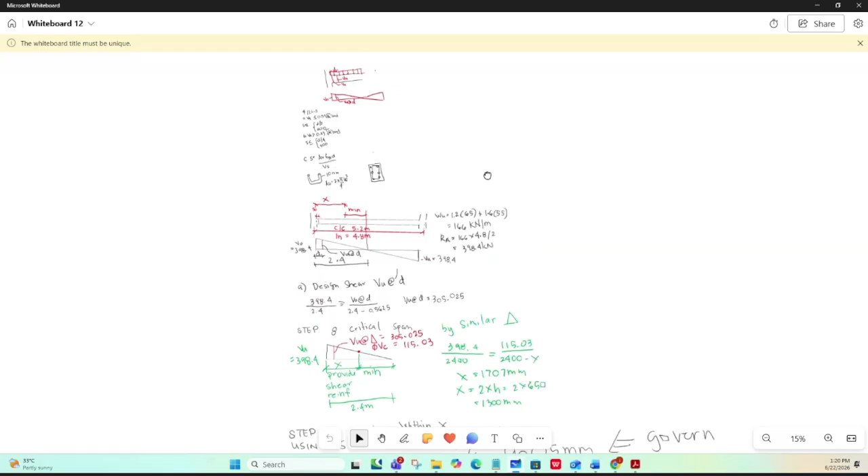Okay, so this is the face of the support. This drawing, this illustration, this sketch is showing the beam and the column, on this side. This is the column and half of the beam. So this provision, 409.4.3.1, allows the VU to be at the face of the support.

So we can use the shear force at the face of the support to design the reinforcement. Or the code also provides a provision that we can calculate the VU at a distance D.

This is for 409.4.3.2, the section between the face of the support and the critical section located at D from the face of the support for non-prestressed beams. For prestressed beams, it's H/2 from the face of the support, and shall be permitted to be designed for VU at the critical section. So the critical section will be at the distance D.

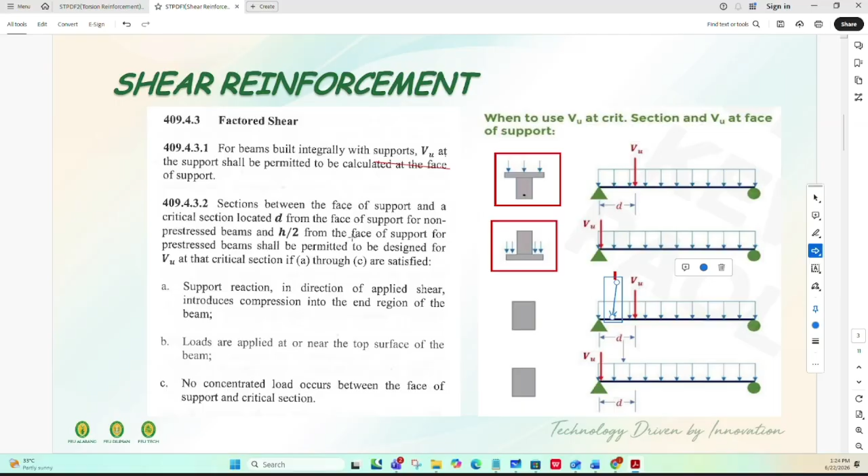So if there is a point load here, meaning either you have a transfer column or a secondary beam connected to this beam, you will not be able to use this provision, point 2. Then you go back to point 1, which is the maximum shear force at the face of the support. That is what this NSCP provision means. And then, for the shear reinforcement critical section, that's done.

So for shear reinforcement design, concrete has a shear capacity - concrete contributes to shear capacity, and concrete itself has significant shear resistance. For non-prestressed members, the concrete shear capacity is calculated using this simplified formula.

This is the shear capacity of the concrete, which is 0.17 lambda square root of FC prime, bW, d. Lambda is for normal weight concrete, equal to 1.0. If it's lightweight concrete, you need to calculate it.

Let me check the provision - there's a provision in the NSCP where you can calculate the lambda for lightweight concrete. I don't think I wrote it here.

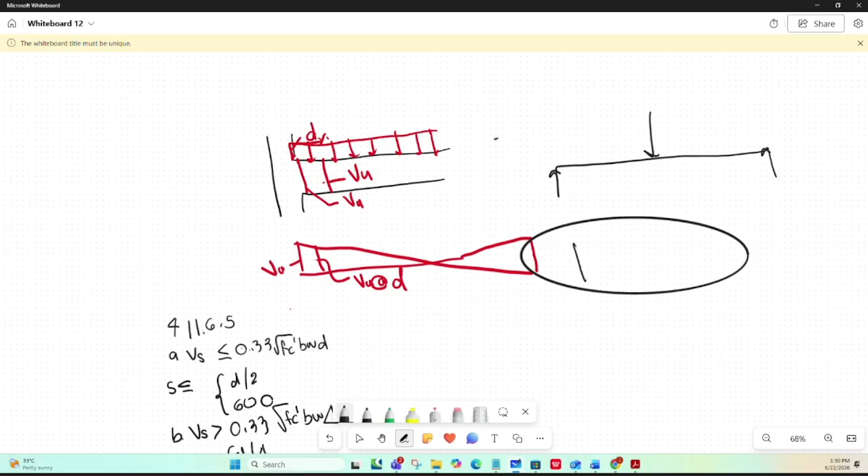So if you have a uniformly distributed or simply supported beam with a point load at the midspan, it will not go to zero. So the shear diagram will be like this, it's like a curve. This is the shear diagram.

So this means it is not zero at midspan, but we need to check. And then definitely if you have a point load, the shear force at that location where your point load is will be higher because you have a concentrated load.

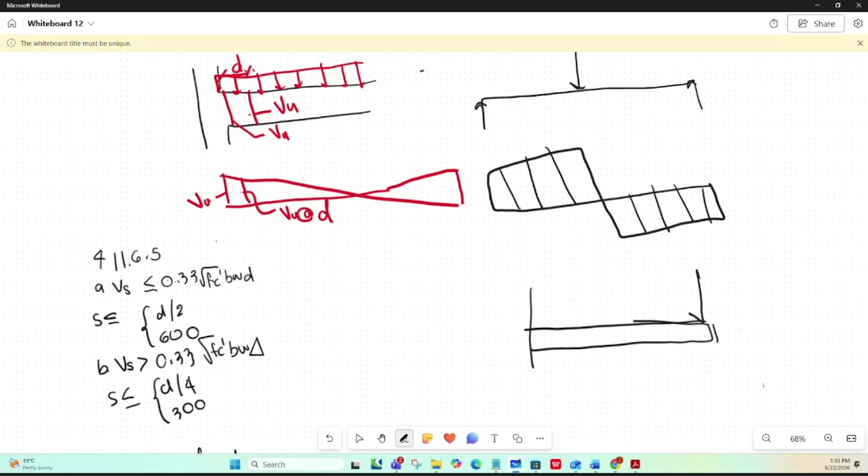And then for a cantilever beam with a point load, there's no zero shear, so it goes straight up. This is cantilever, the support is here only.

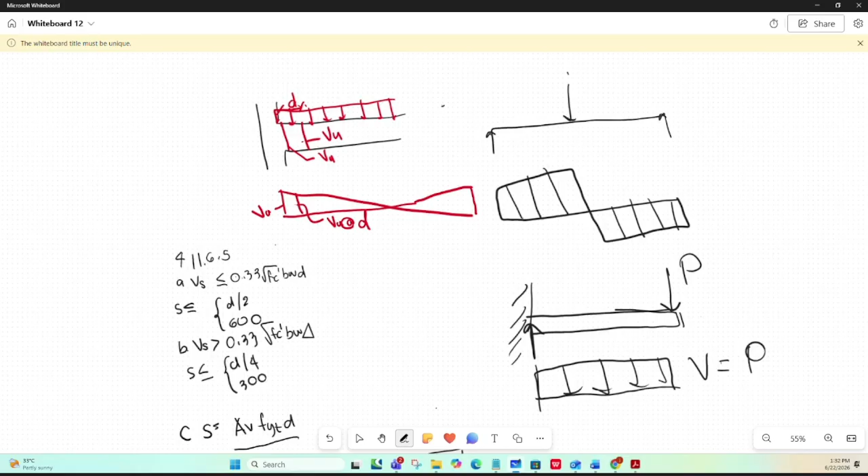What else do we need? Okay, so that's it for the analysis.

So for the strength reduction factor in reinforced concrete design, we do not use theoretical capacities directly. Instead, we apply the strength reduction factor represented by the symbol phi. For shear and torsion, phi is equal to 0.75, meaning only a portion of the calculated shear capacity is considered reliable for design purposes.

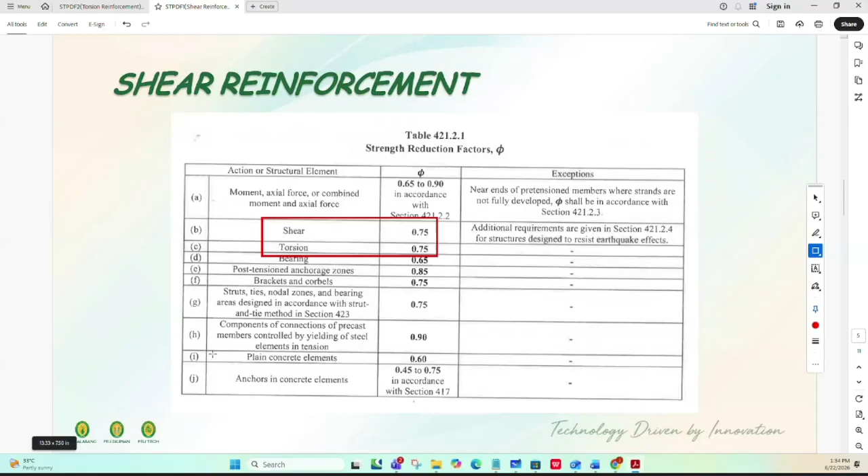Then, maximum shear strength. The code provides a limit for the shear strength Vs. It shall not be taken greater than 0.66 times square root of FC prime, BW, d.

So what does this mean? Can we simply add more stirrups whenever shear demand increases? That means if the shear capacity demand requires more than this value, we cannot just add shear reinforcement. The code limits the maximum contribution of shear reinforcement according to this value, 0.66 square root of FC prime BW d.

This provision recognizes that concrete can eventually crush before the stirrups reach their full capacity. In other words, this is a practical limit to the amount of shear that a beam can safely resist. So if the required shear strength exceeds the code limit, the engineer should consider either increasing the beam depth, concrete strength, or beam width, since the formula is directly proportional to the Vs capacity. Increasing any of these three will increase the Vs.

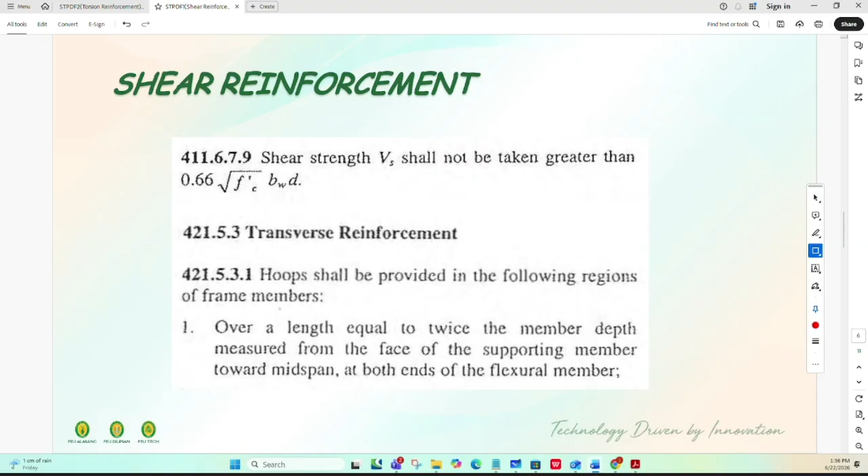Okay, stirrup spacing limits. After determining the required stirrup area, we must establish the proper spacing. For non-prestressed beams, NSCP specifies that the spacing of shear reinforcement should be D/2.

And for prestressed members, it is 0.75H or 600, whichever is smaller. So this is the spacing.

So why do we need to limit the spacing? Imagine a diagonal crack forming between two stirrups. If the stirrups are too far apart, the crack might grow significantly before encountering reinforcement. So closer spacing means better crack control, improved shear resistance, and increased ductility. The code further requires reduced spacing when the shear demand becomes higher.

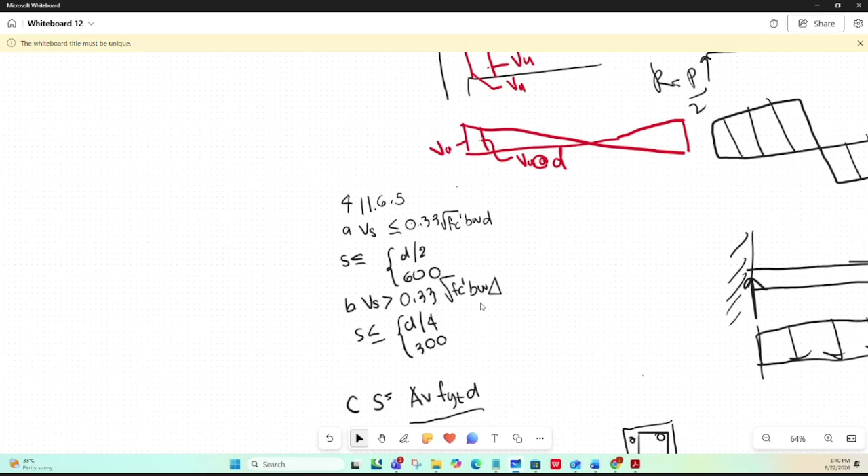4.11.6.5: first, if Vs is less than 0.33 FC prime BWD, S should be less than D/2 or 600. And if Vs is greater than 0.33 FC prime BWD, S should be less than D/4 or 300. You can also check S if the spacing equals Av fyt, which is the tensile strength of the links or the stirrup, and d over Vs.

So to get the area of the shear, it should be 2 times the area of the stirrup diameter. So 2 times pi over 4, 10. If the stirrup diameter is 10, it will be 10 squared. Av will be 2 times the area of the 10 mm diameter stirrup. Okay.

Provision 421.5.3.2 is an earthquake provision providing the maximum stirrup spacing. First, the maximum spacing of the hoop should not exceed D over 4, the effective depth over 4, or 8 times the diameter of the smallest longitudinal bars, which is either the compression or tension reinforcement, the horizontal reinforcement. And then 24 times the diameter of the hoop bars or the stirrup, or 300, whichever is smaller.

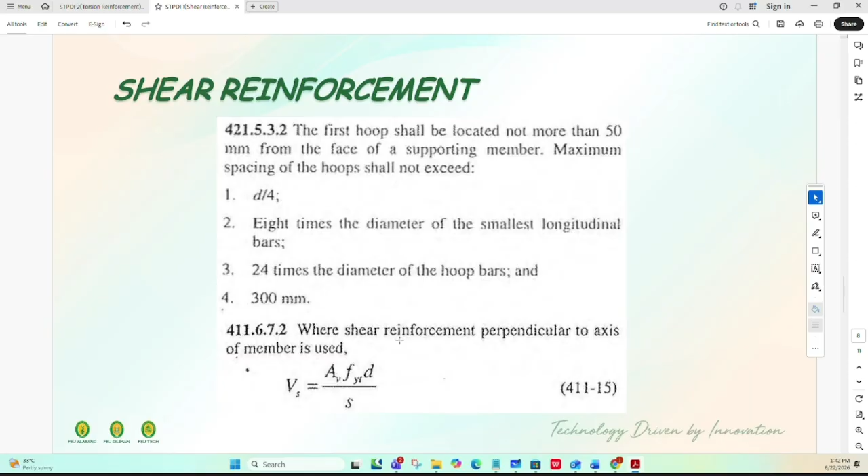And then for this spacing, we can use this formula: put S on top and then Vs below, then we can compute the minimum or maximum spacing, and then choose the least value.

Okay, let's answer this example. We have a 5.2 meter span, simply supported beam, with a clear span of 4.80 meters, carrying a uniformly distributed dead load and live load. The dead load is 65 kilonewton and the live load is 55 kilonewton per meter. It's simply supported with a 5.2 span, clear span 4.8.

The dimension of the beam section and steel reinforcement are shown: 350 width and 650 height. We have 28 mm diameter for the compression reinforcement, and tension reinforcement is 32 mm diameter. Design the necessary spacing of shear reinforcement if FC prime is 21 megapascal, Fy is 415, concrete cover is 61.5, and stirrup diameter is 10 mm.

So the first step we need to do is determine the reaction and compute the shear force at the base of the support. Since this is the loading, we can see that the loading is on top of the beam, and we don't have a point load on the critical section.

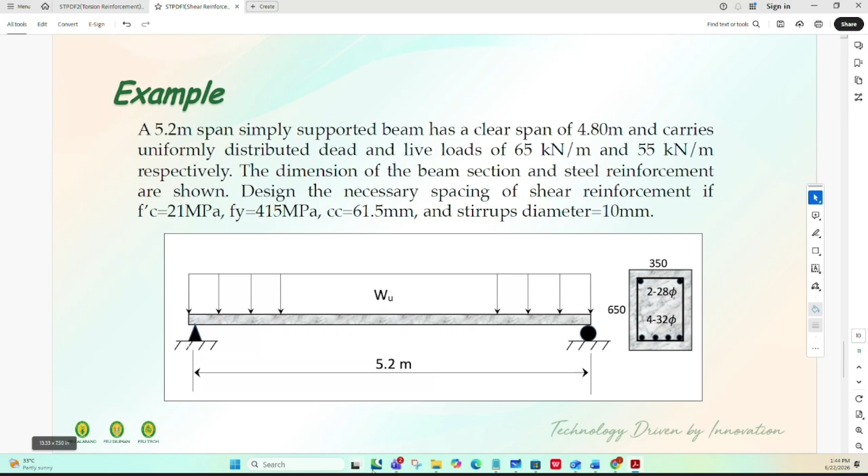Then we can use the provision to get VU at distance D from the base of the support. So let's compute this, we already completed it earlier. So this is the center to center space, which is 5.2.

So clear span is 4.8. Calculate the ultimate load using factor 1.2 for dead load and 1.6 for live load. Then we get the total ultimate WU of 166 kilonewton per meter. Since it's symmetrical, we can just multiply by the length divided by 2, using 4.8 because we're taking the VU at the face of the support, which is equal to VU is equal to 398.4.

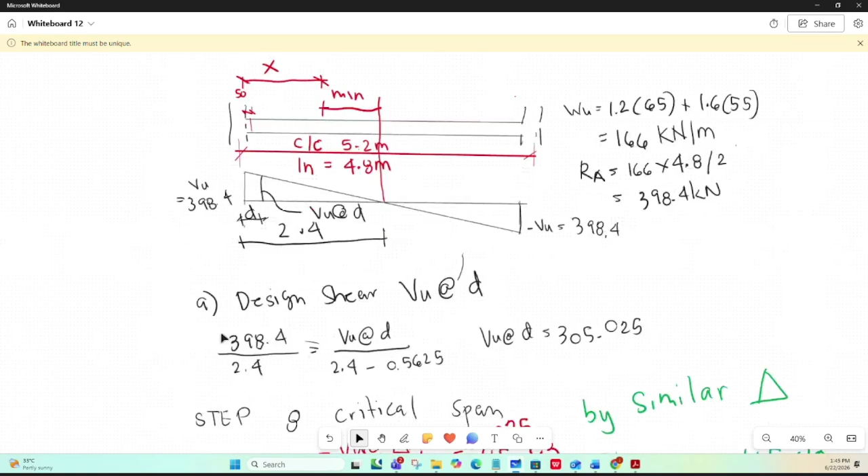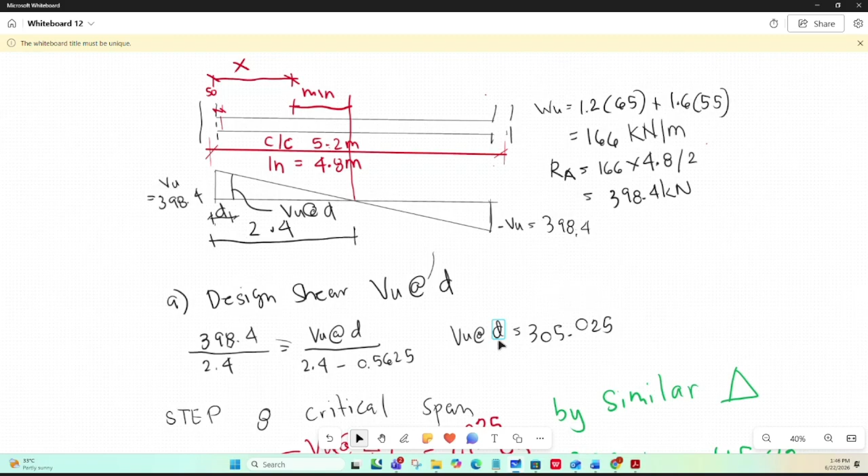That will be used to compute the shear at VU at distance D. Using a similar triangle, we have the VU value 398.4 over 2.4. Because it's a simply supported uniformly distributed load, we know that at the mid span the shear is zero. So we can use this triangle to calculate VU at distance D. So 2.4 minus D, and we will obtain the value of the shear VU, the ultimate shear force that we will use for the design, which is 305.025 kilonewton.

Okay wait, kilonewton. Okay, then I have the calculation here also. This is the check shear capacity part.

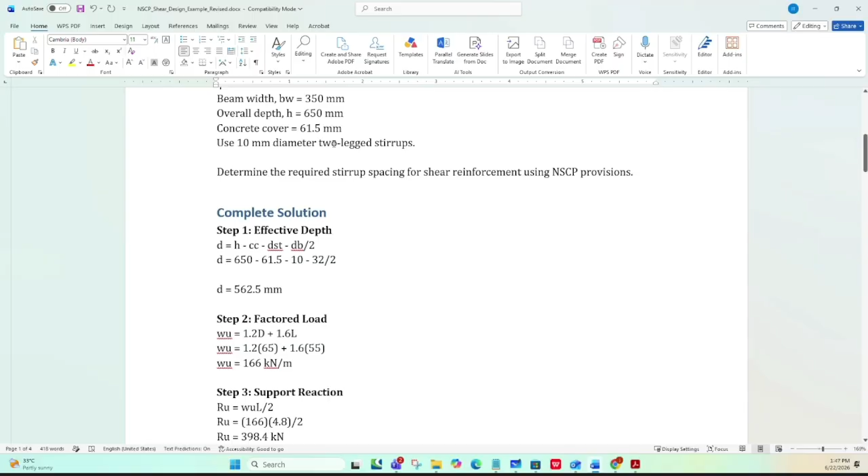First we also need to determine the effective depth. The effective depth is the distance from the topmost compression fiber of the concrete to the center of the tension reinforcement. So effective depth D is equal to H minus concrete cover minus the diameter of stirrups minus diameter of the main rebar over 2. Concrete cover is 61.5, so D is equal to 562.5.

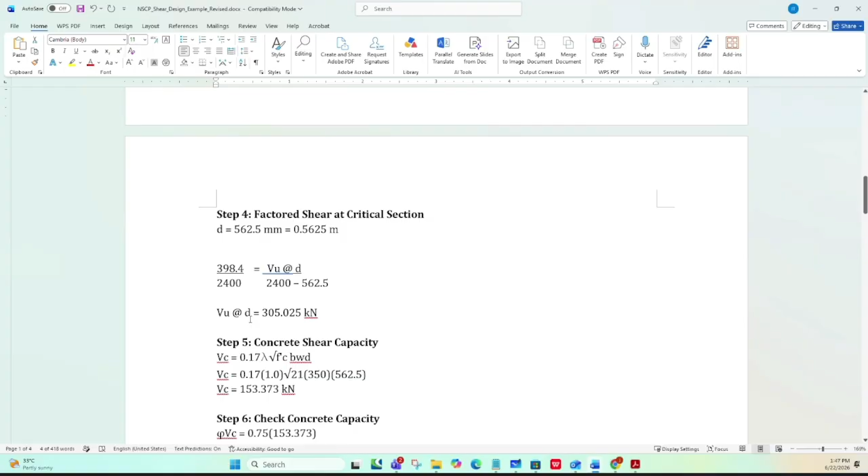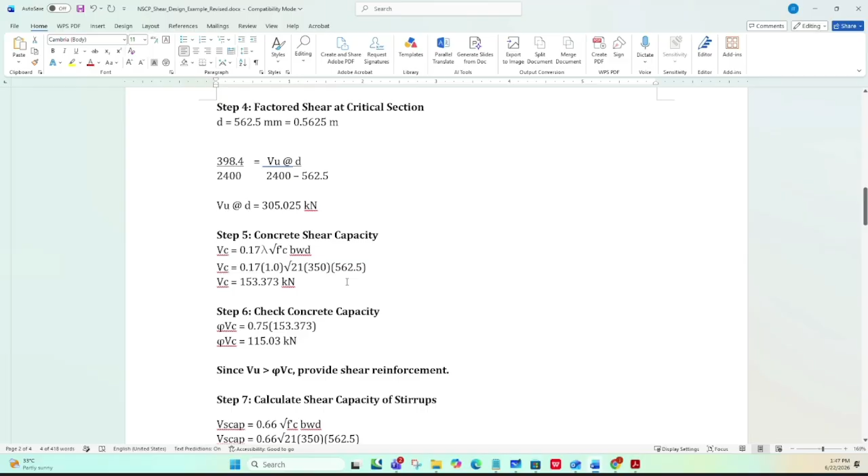I mentioned this earlier, and this is VU, and the factored shear at critical section. So then compute the shear capacity. Step 5, compute the concrete shear capacity, which VC is equal to 0.17 times lambda. Lambda is 1.0, square root of FC prime 21, BW 350 by 562.5, and VC is equal to 153.373.

Step 6, check the concrete capacity. So you have VC, then multiply by 0.75, because this is nominal, so we usually multiply by the reduction factor for the shear capacity, so it will be 0.75 times VC. Since VU is greater than phi VC, we need to provide reinforcement, because VU is from the load, and this is the capacity of your concrete.

So if you plot this phi VC into the shear diagram, it will be this. Taking half of the shear diagram, phi VC is at this point, equal to 115, and VU at D is equal to 305. So it means this part of the beam we can provide minimum reinforcement, and this X distance we have to provide shear reinforcement, which we will compute later. That's why we need to compute phi VC first. This is the meaning - phi VC is the capacity, as I mentioned, concrete has a shear capacity, so the concrete can contribute to the shear resistance.

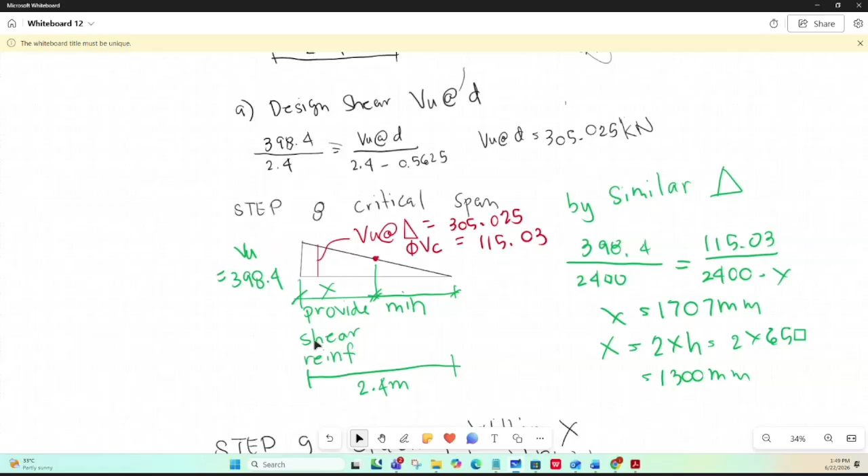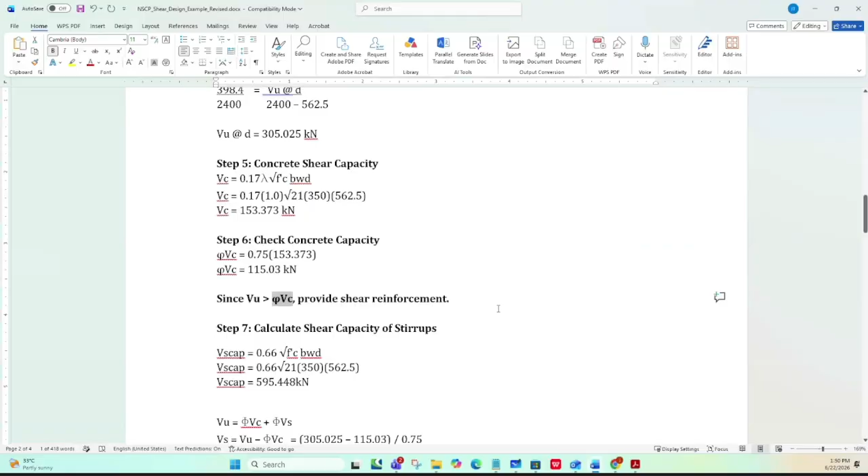So we can provide minimum reinforcement here, and only at this part will we check the shear reinforcement based on VS. By similar triangle, we can calculate this critical span. Is that right? Okay, not yet, so here it is.

As I mentioned earlier, we need to calculate the shear capacity of the stirrups first. First check the code requirement, VS capacity - this is the limit that you will provide for your stirrup. If your required VS is greater than this, we need to revise the section. As you can see in this equation, if you increase the concrete capacity, FC prime, or BW, you will be able to increase this value. But for now, using this section, the VS capacity limit is 595.448 kilonewton.

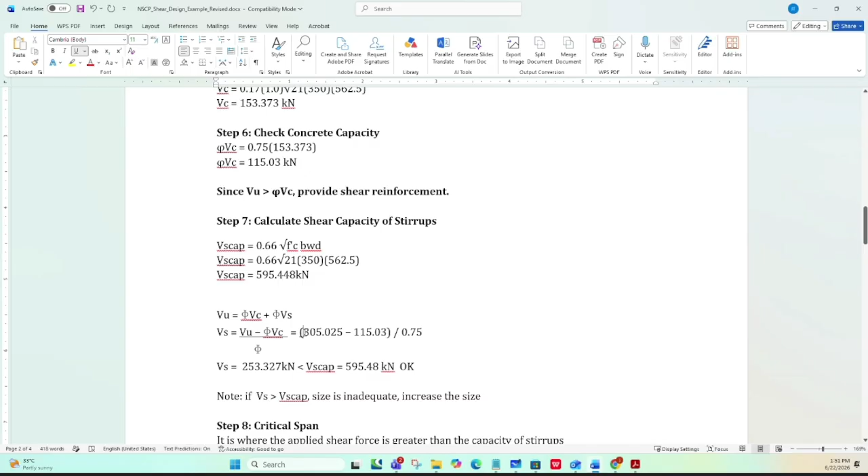This is based on the loading of VU, and phi VC is the concrete capacity, then we will be able to determine the VS, which is the reinforced strength of the links that you require. To calculate VS, you just subtract the concrete capacity from the computed VU, using the value of VU at distance D from the support. So VS equals 253.327, which is less than the VS capacity, therefore the section is adequate, we can proceed, and this is what we will use to obtain the spacing of the stirrups. Note, if VS is greater than VS capacity, the size is inadequate, and as mentioned earlier, we can increase either one of these three factors.

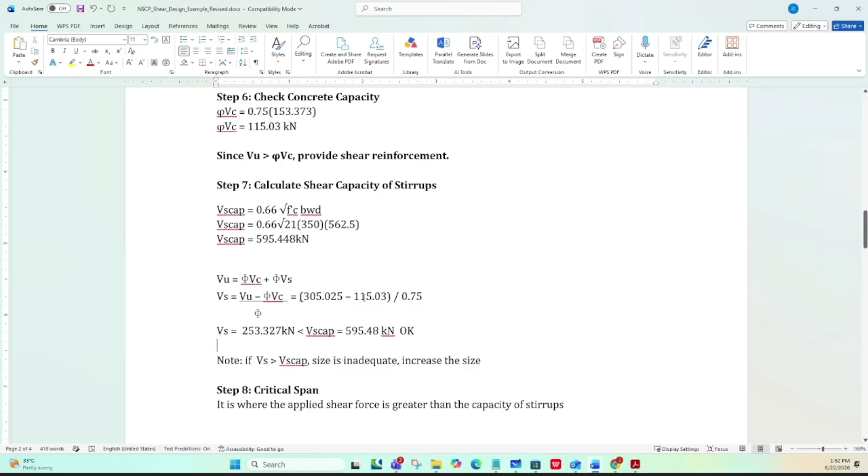And then critical span - next we have this. So after we have obtained VS, we can calculate the critical span, which is at this distance.

Where is that distance? Here, this is our critical span. This is where we need to provide the reinforcement.

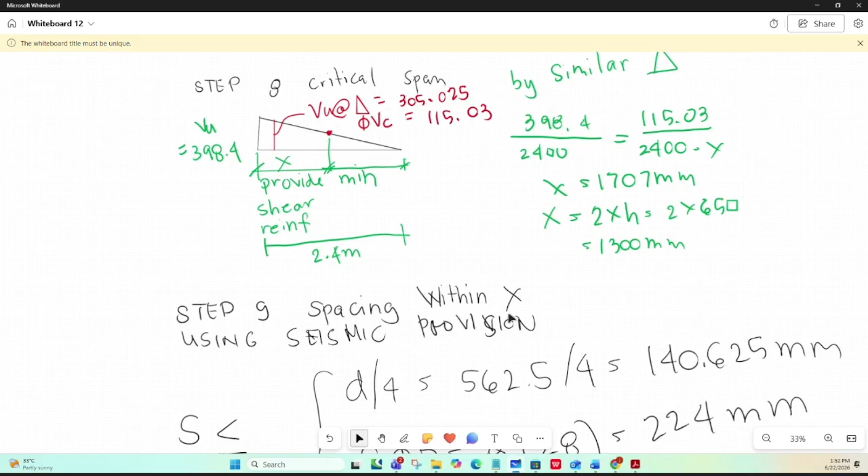So step 9 is spacing with the... not yet, sorry. Step 8 first: calculate the critical span.

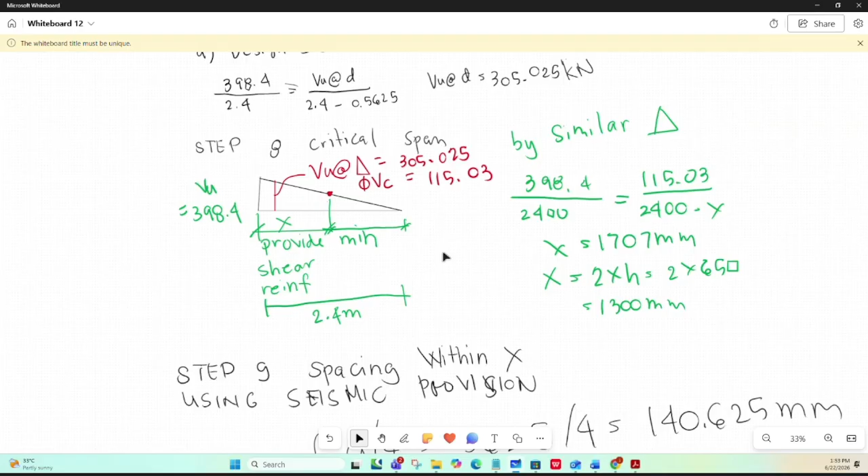So by similar triangle, using because we know that the VU at the base of the support is 398.4, and then the span, the length of this is half of 4.8, because it's symmetrical, right? So if you have a point load, you need to calculate that.

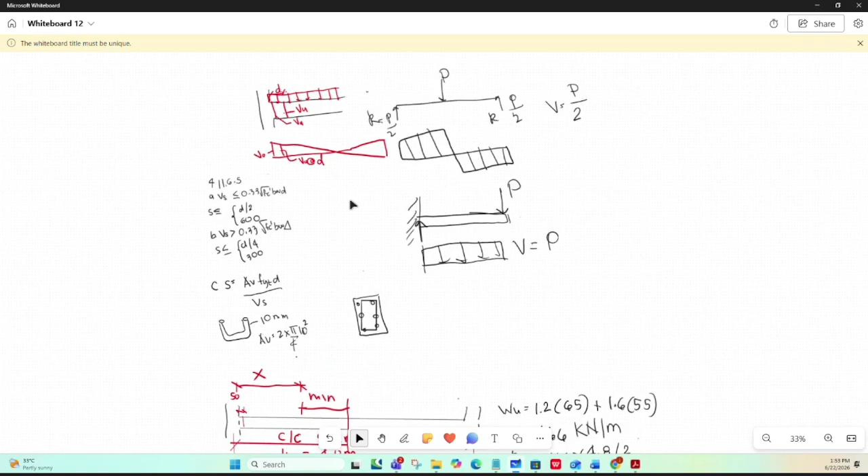So if the shear, it depends on your shear diagram. You need to, before you can solve this shear reinforcement requirement, solve for or draw the shear diagram. And then what else?

So once you calculate using the similar triangle principle: 2.4, and then this is your phi VC 115.03, then 2.4 minus x, so x will be 1707. Another provision in the code is x should be 2 times h, or the total height, which is 2 times 650. So choose the higher value, which is 1700. So then this spacing will be labeled.

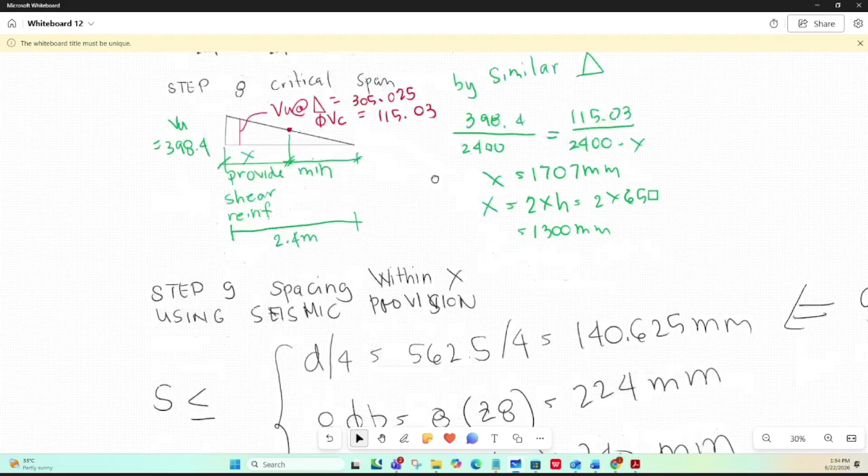And then step 9: compute, since we already know the length of the critical span, we can calculate the spacing within the length x. So using the seismic provision, the spacing should be d over 4.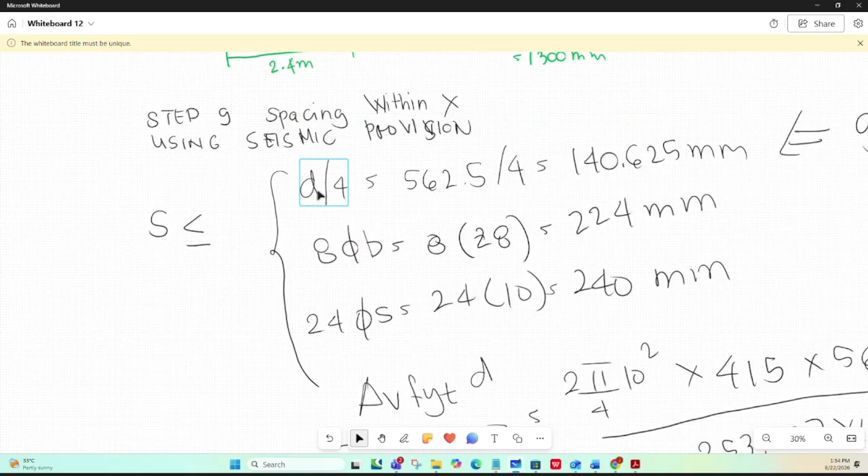So 562.5 over 4, and then or 8 times the diameter of the main reinforcement, either compression or tension reinforcement, or the least value, which is 28. And then 24 times the stirrup diameter, so 240. And then using this formula AvFyt d over Vs, we can compute the required spacing, and then choose the lowest value. So this one will go for 140.

So we have to choose the lowest value, 140, and then calculate the number of links at this.

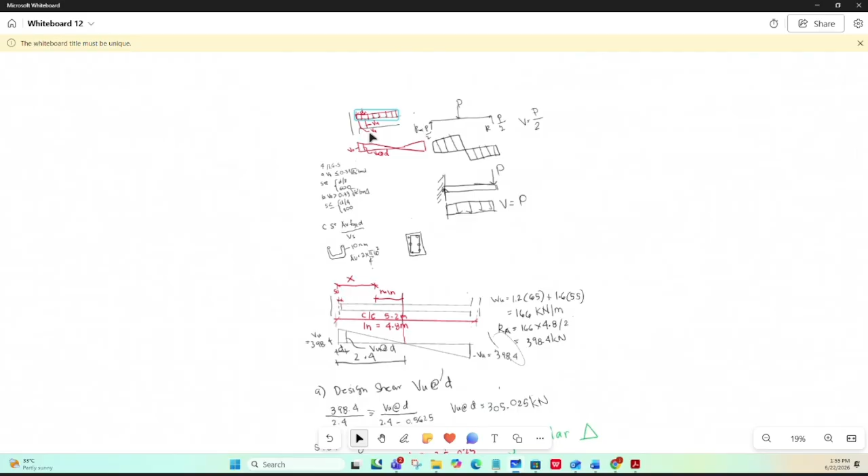Based on the code provision, we have to provide the first reinforcement at a distance of 50 mm from the support edge. That's why I have this. So if this is your beam, the first reinforcement is at a distance of 50 mm from the base of the support, and then this will be x, and then from here to the center is the minimum shear reinforcement.

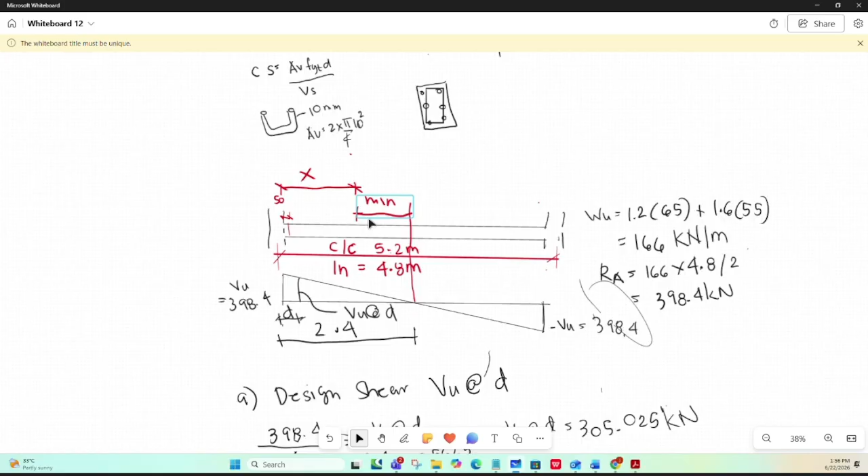So to calculate, n is equal to x, which is 1707 minus 50, divided by spacing, so the number is 11.8, so just round off to 12, because you cannot provide a fraction of a reinforcement. It should always be a whole number for the number of reinforcement.

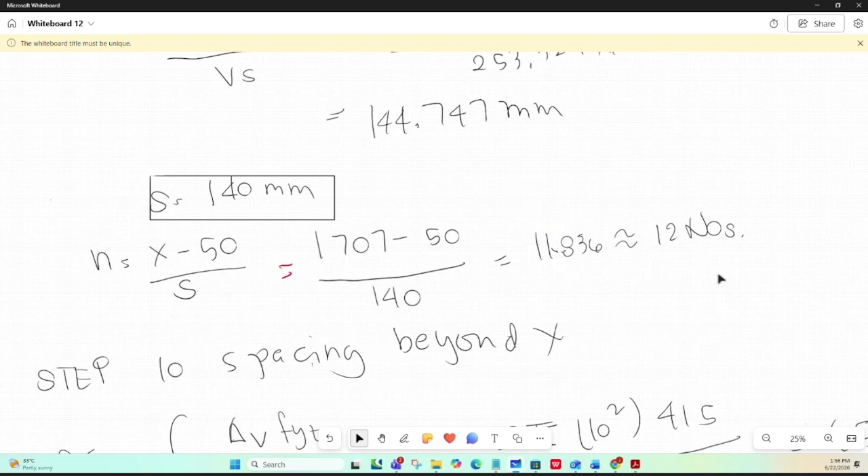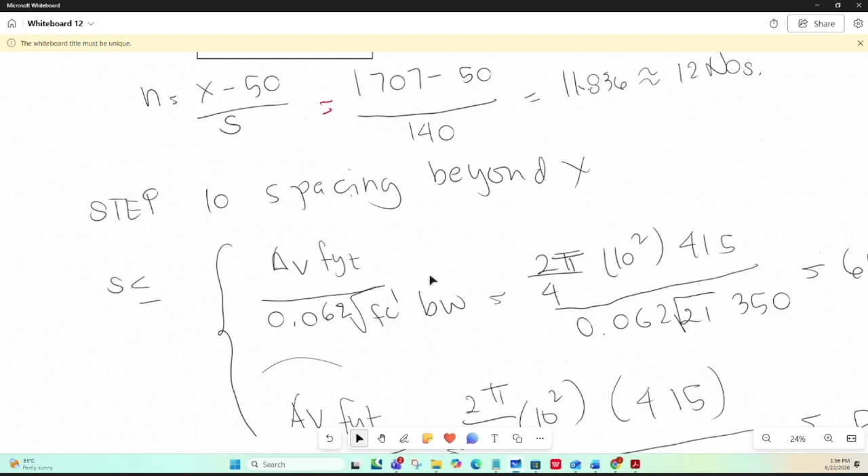And then step 10, spacing beyond x. So for spacing beyond x, we can use the minimum reinforcement provision from NSCP 411, point... what is it? Wait, what is it?

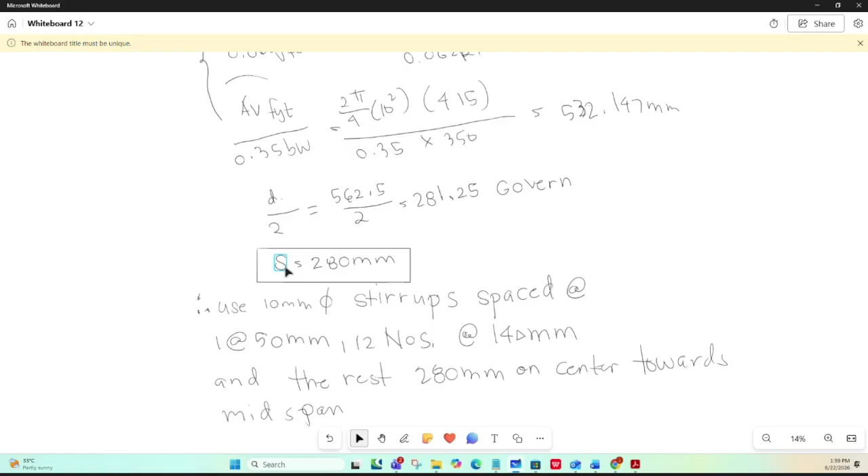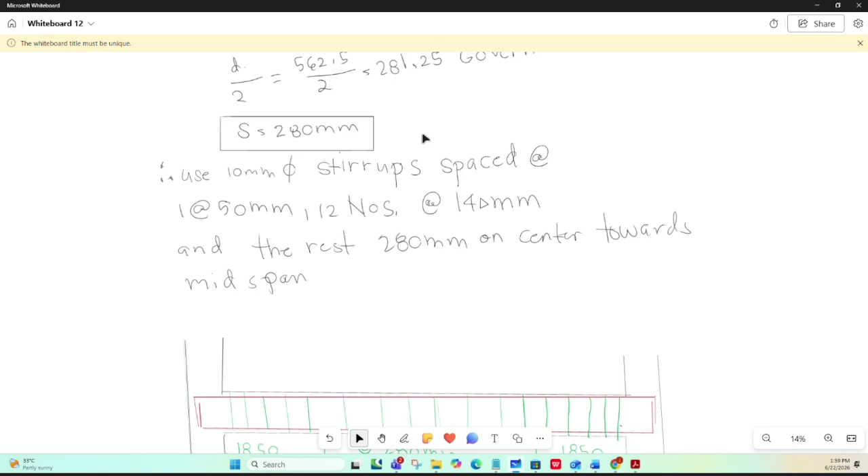This longitudinal reinforcement is for your flexure or bending moment, and then the shear is handled by the vertical stirrups. So this is the summary.

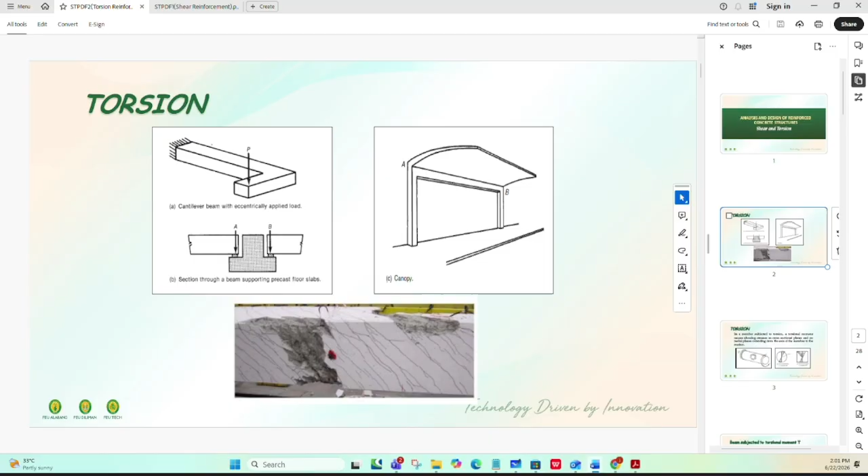Okay, so number one, first is if it's a cantilever with an eccentrically applied load. So there will be, because you have this cantilever, and then, yun na nga, first pala.

So let's first define torsion. When we hear the word torsion, think of twisting. Torsion occurs when a structural member is subjected to a moment that causes it to rotate about its longitudinal axis, unlike flexure, which bends the beam.

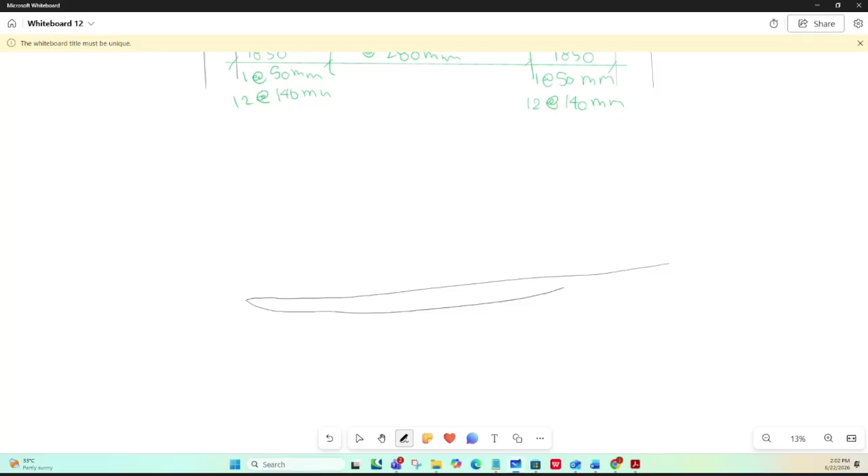So torsion is twist. Let's draw what torsion is. If it's a moment, it will bend, right, that's why it's called bending moment.

If it's torsion, usually the load is eccentric, it's not at the centroid. Or maybe you have a slab on one side and no slab on the other side. So this slab loading will tend to twist the beam.

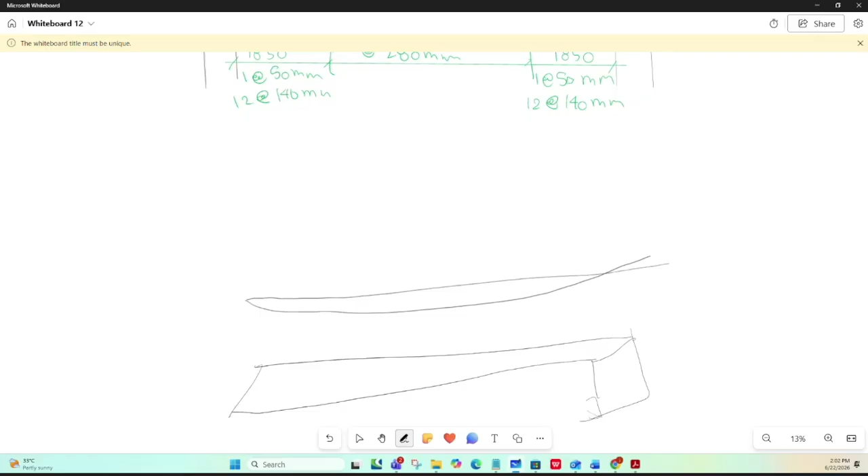So for bending, the moment direction is this way, right? But for torsion, the direction of the moment is this other direction. It will twist the beam.

So torsion is particularly important because it can produce brittle failure if not properly accounted for in the design. The beam is usually designed for bending and shear, but certain structural configurations require special torsion reinforcement.

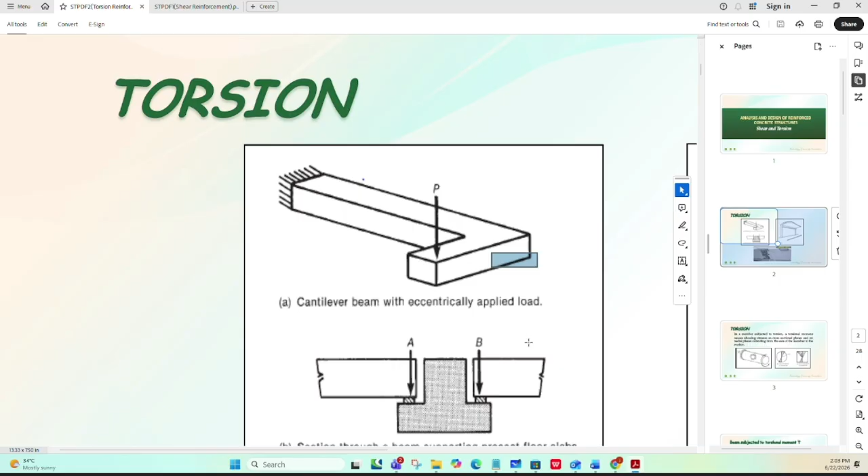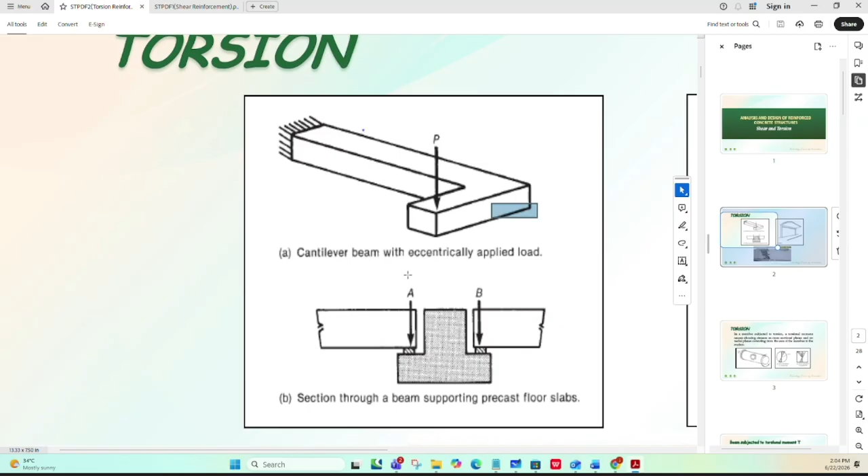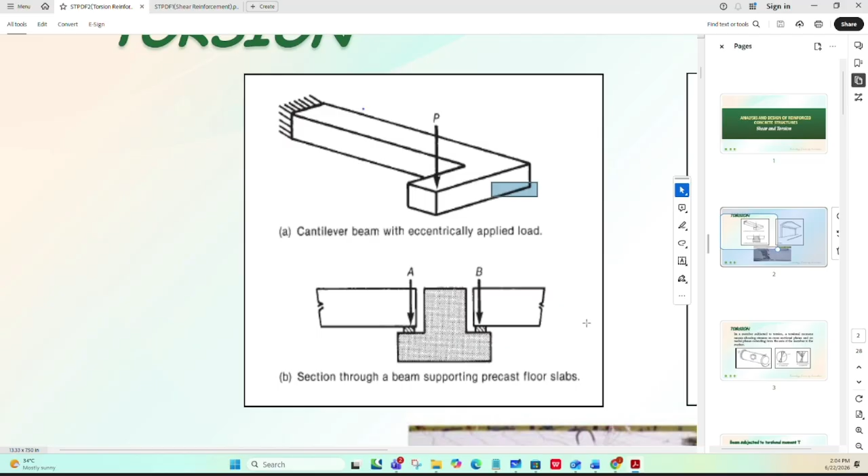These are the examples. Number one is a cantilever, usually found in bridge structures, like the section through a beam supporting precast floor slabs. If load A is higher than load B, there will be twisting towards load A. So we need to provide torsion reinforcement, or check the torsion capacity of the beam to account for it.

And another example is if you have a canopy like this, which is a cantilever. This cantilever canopy's load will tend to twist this beam.

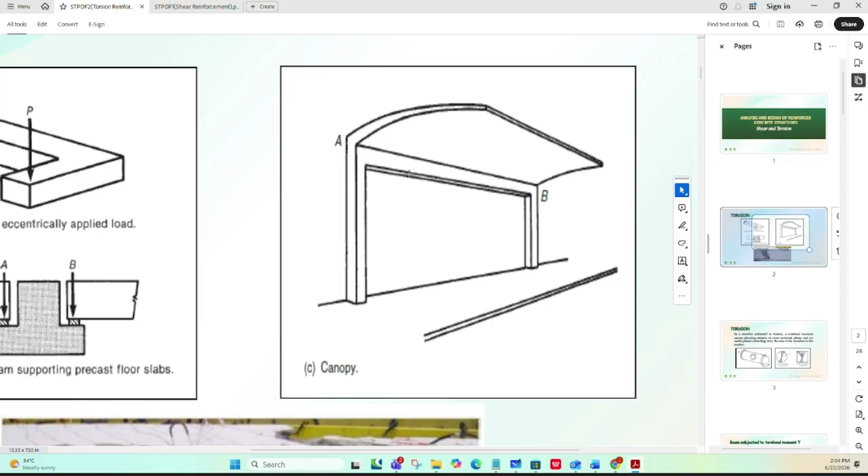So what happens is, a member subjected to torsion experiences a torsional moment that causes shearing stress on cross-sectional planes and on radial planes extending from the axis of the member to the surface.

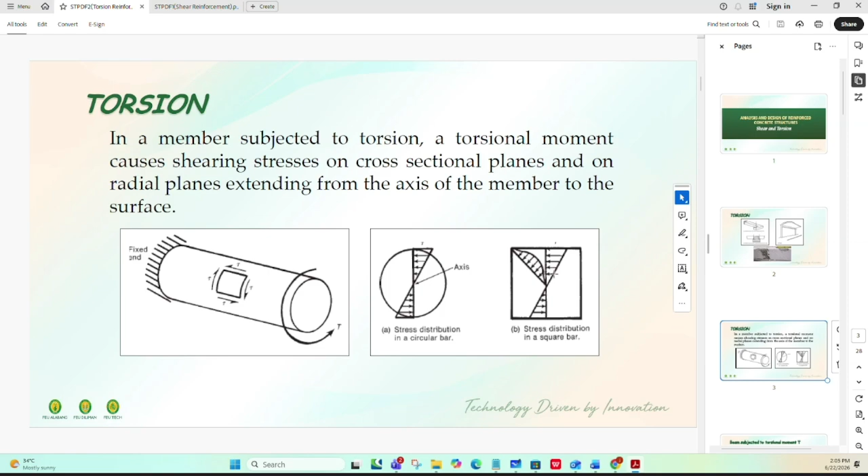So a beam subjected to torsional moment has shear stresses like this. So if there's torsion, it will cause this cracking, and it's not one dimensional.

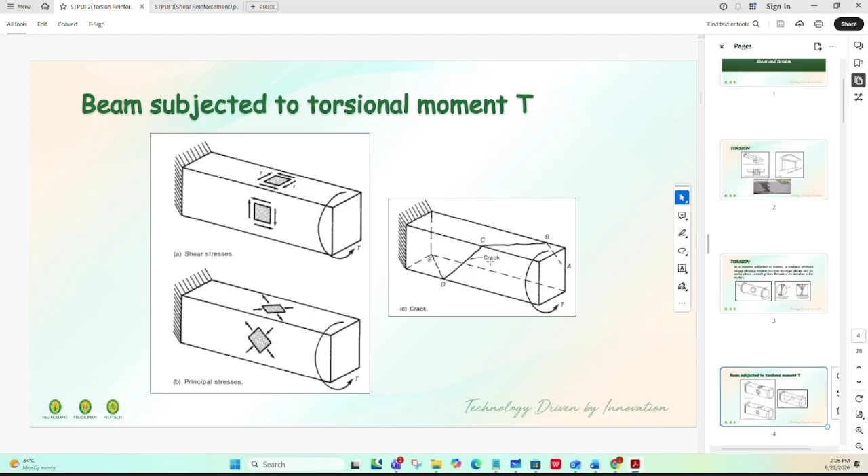It's 3D. From the bottom, if here is fixed and there's resistance on this side, the torsional stress goes to the sides, 1, 2, 3, 4 sides. So it rotates, and this can cause this crack.

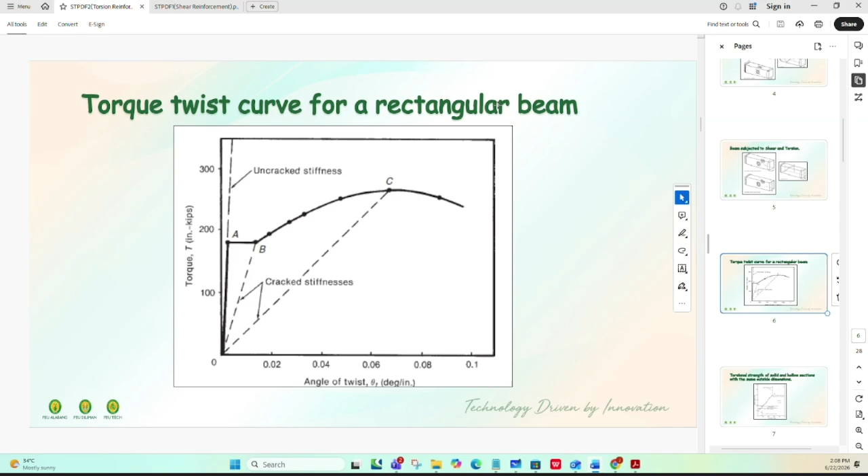So we have a threshold torsion. NSCP recognized that a small amount of torsion may be safely resisted by concrete alone. This limit is called the torsion threshold. If the applied torsion is less than the threshold value, which is TU...

TU is less than the threshold value. TU is the threshold for non-prestressed members. The threshold is phi times lambda square root of FC prime, times ACP squared, over 12 PCP. ACP is the area, and PCP is the perimeter.

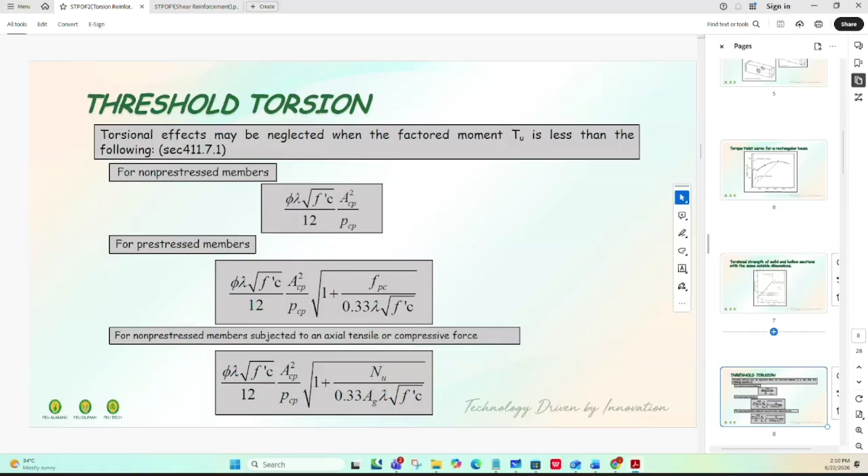This is the beam. To calculate the threshold torsion, two geometric properties are required. ACP is the area enclosed by the outside perimeter of the concrete section.

For rectangular beams, ACP is equal to B times H, and PCP, the outside perimeter of the section, is equal to 2 times (B plus H). If the beam is cast monolithically with the slab, a portion of the slab flange may be included according to the code provision. The effective overhang should be less than H minus HF (total height minus slab thickness), or should be less than 4 times HF, the thickness of the slab.

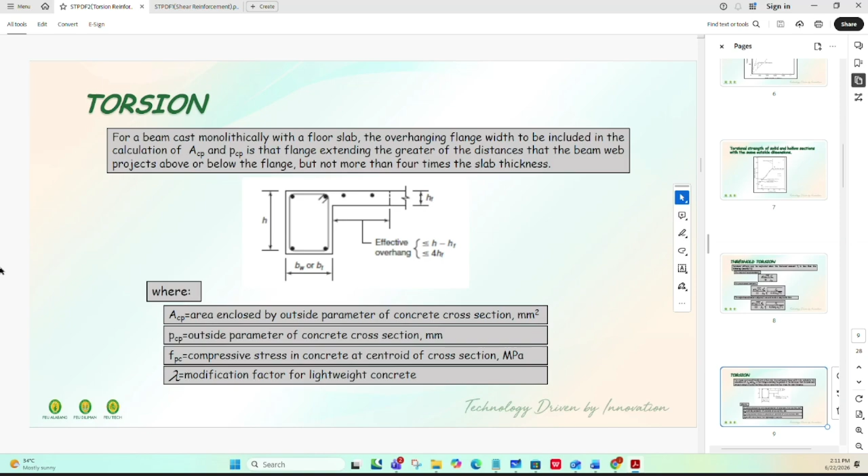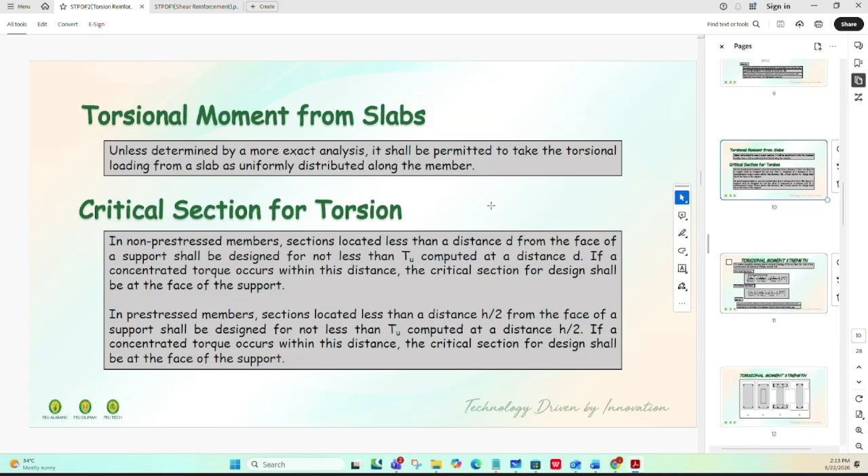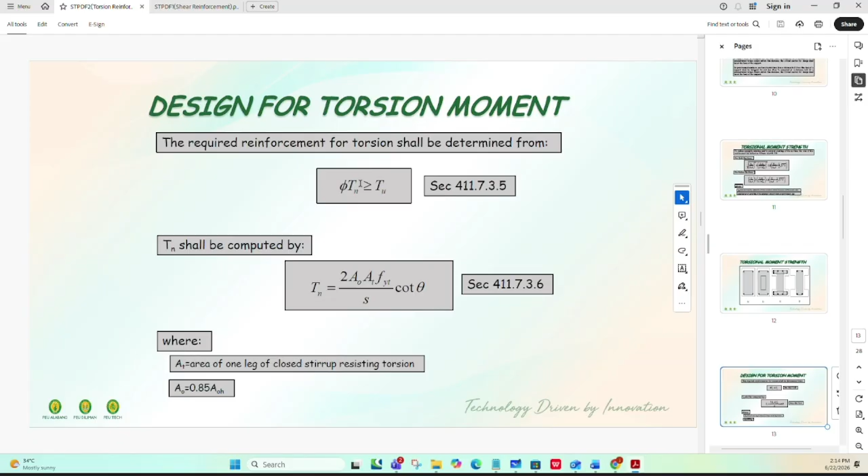So always remember: torsion requires both transverse and longitudinal reinforcement.

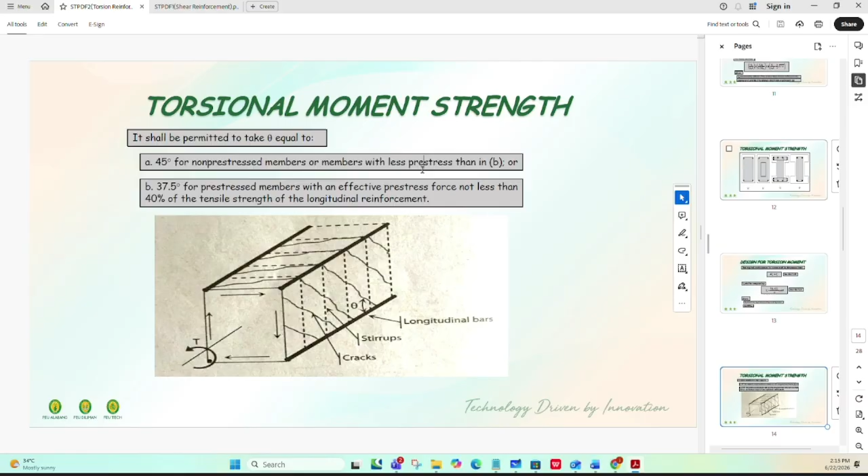Let's go to the example now. This is the additional longitudinal reinforcement equation. Let's solve this example: spacing of torsion reinforcement.

The spacing of transverse torsion reinforcement shall not exceed the smaller of PH over 8 or 300 mm. The longitudinal bar or tendon shall be inside the stirrups with a maximum spacing of 300 mm. There shall be at least one longitudinal bar or tendon in each corner of the stirrup. Longitudinal bars shall have a diameter of at least 1/24 times the stirrup spacing, but not less than 10 mm.

Torsional reinforcement shall be provided for a distance of at least BT plus D beyond the point required by analysis, where BT is equal to the width of that part of the cross-section containing the closed stirrups resisting torsion.

So for this example: the one-way slab system shown supports a total dead load of 8 kPa and a live load of 6 kPa. So design... where is this now?

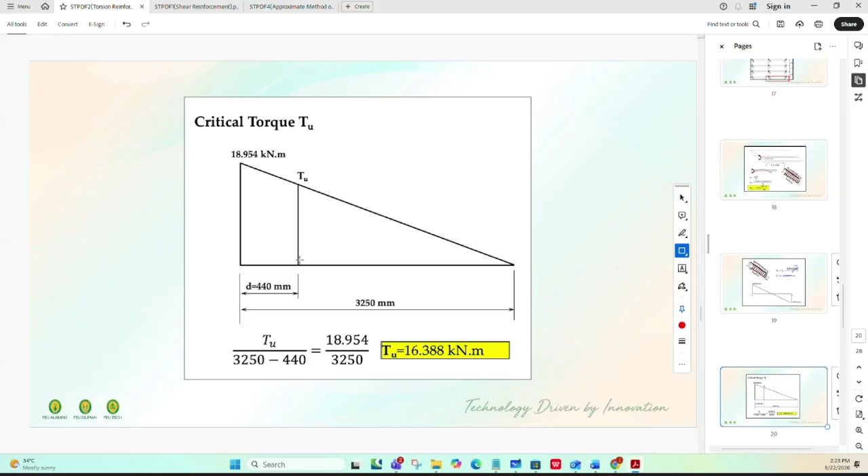So if it's at TU at the base of the support, or at the distance D from the base of support, that will be your TU. Then threshold torsion using this formula, Tth is equal to 0.75 lambda square root of FC prime, A squared or ACP squared over PCP.

So ACP is equal to 700... ACP, 190... 700 times 100 plus 400 times 300. There it is. So the ACP area of 700, this is 700, this whole length is 700 times 100, and then 400 times 300.

Okay, so it will include the overhang slab for ACP, and PCP is equal to, just take the perimeter. So based on this formula, we can calculate the threshold torsion, which will be the torsion capacity of the concrete. So if TU computed is 16, we need to consider torsion, we need to compute. So check the size of the section first.

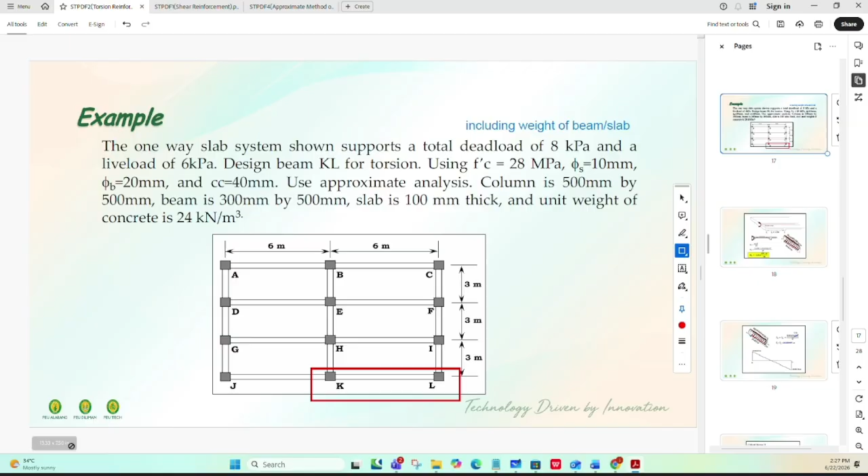Using approximate analysis, this is what we will use. So, we will have this for shear.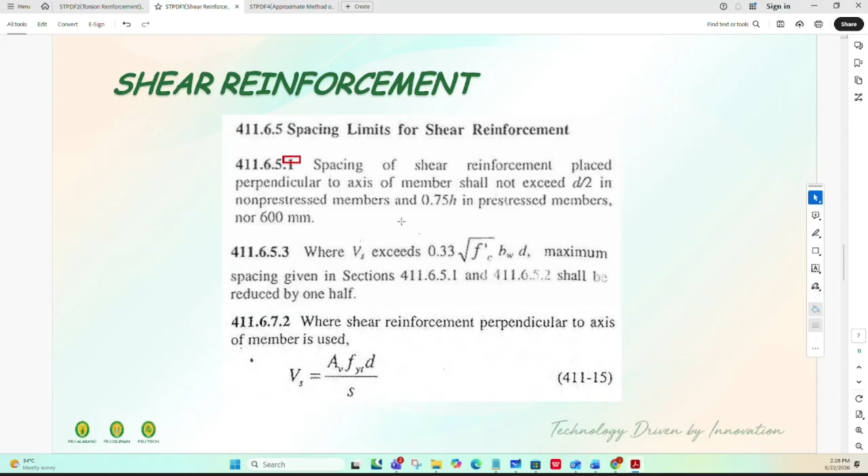So the shear is: if it's at the exterior face of the first interior support, 1.15 WU ln over 2. If it's at other supports, WLn over 2. So first is the exterior face of the first interior support.

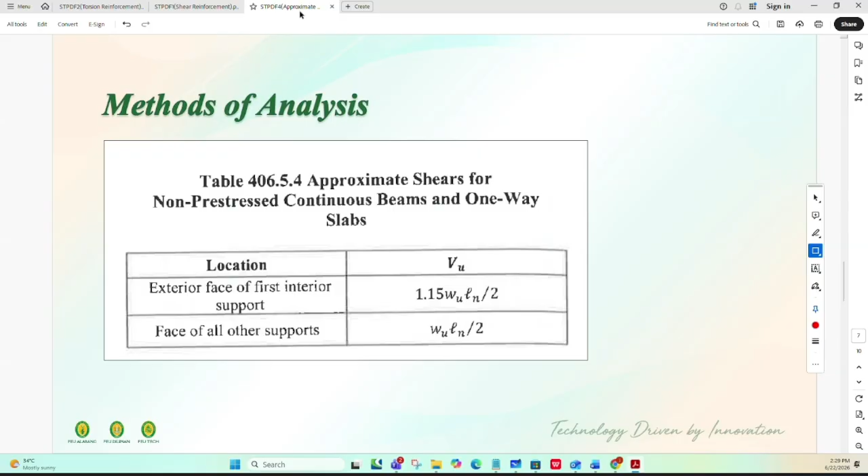So the 1.15 factor applies here at the exterior face of the first interior support. So it's WU times 1.15 over 2, and the other supports it's just WLn over 2. So since then we can calculate X.

Same as with the shear, since there's no drawing here, let me just draw it. D is 440 as well. So this will be the VU at a distance D.

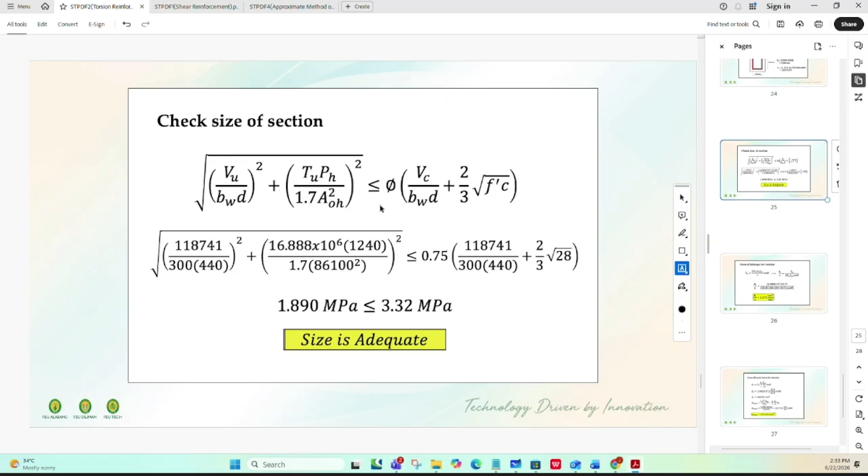Torsion rebar: area of torsion over spacing. And then the area of main bars for torsion — wait, let's go back to that At over spacing value from earlier. This is for additional longitudinal reinforcement, AL.

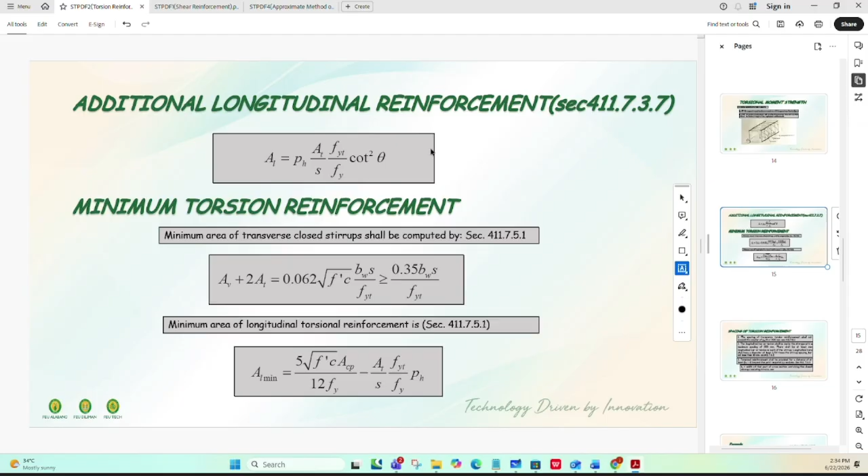So for AL, this section uses the formula with cotangent squared. This is the additional longitudinal reinforcement area that we need to add, and then we check the minimum. Since the minimum is higher, you use that as the longitudinal area.

So that is the AL minimum. This is for the additional area of stirrups for torsion, At over S. So, given the values, we can assign and substitute to find the area of the stirrup for torsion, and then we would know the spacing.

Or you can use a table if you have one. Let me check if I have a table for this. Hopefully I have it available for this design.

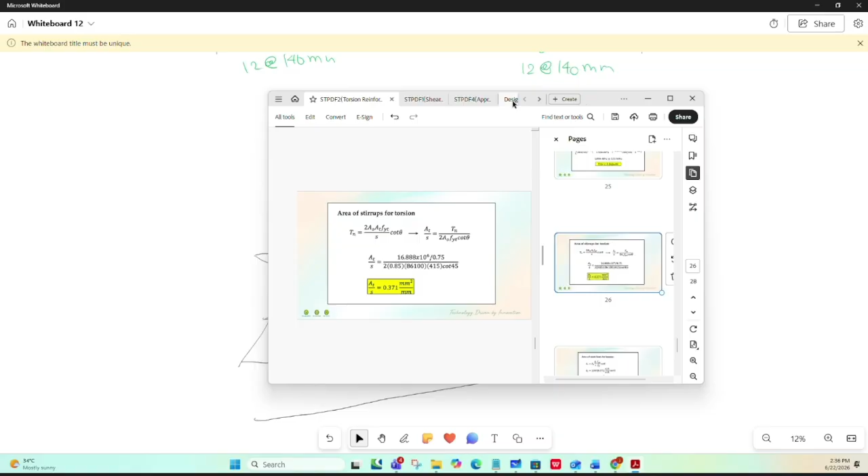The required value is 0.371. We can use this table — so it's only 0.3, so we can use the minimum. If it's a 10 mm diameter bar, since this is ASB over spacing, using 10 mm, the ASB is 0.523, which is still greater, so you can use 10 mm diameter with 300 mm spacing.

Or if you want to be exact, you can use a 6 mm diameter with a spacing of 175, and it will be safe, since up to 0.371 is needed, and at 175 spacing it gives 0.323. So you can use 6 mm additional bars with a spacing of 175 mm, or you can just multiply to verify.

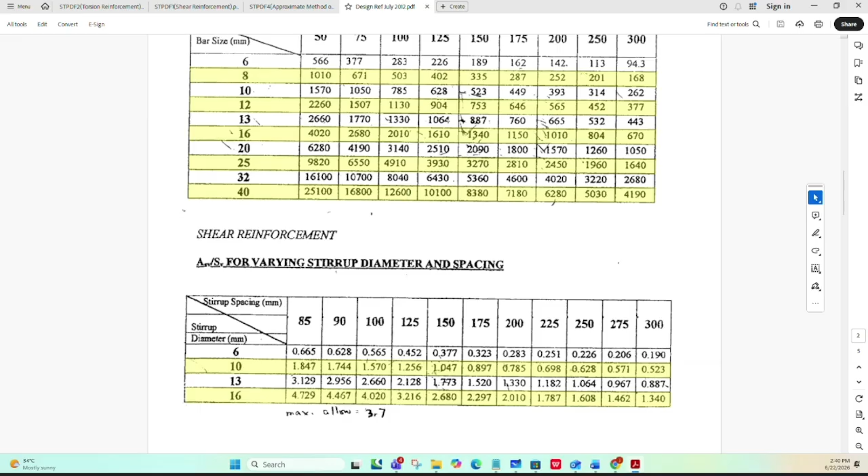0.325. Ayun, so para makuha mo yung okay, para makuha mo yung spacing for this, pagka ganito yung nakuha, if it's At, kasi this area ng torsion reinforcement is di ba same as sa shear, which is 2 times pi, ano pa pi?

Wala, kung 2 times ng area, diameter na lang, 2 times, or let's say 10 mm yung links, times, lagay ko na lang yung pi na word kasi hindi ko makita yun, times pi, 10 squared over 4, di ba, over 4, 10 squared, then divided by 4. Yun yung area ng torsion stirrups over 4 times 2.

And then para makuha mo yung spacing, ano ba? Divide pa siya, divided by 0.371. Yan. So then equals, so S pala, S. Kasi S, ayan, S is equal to,

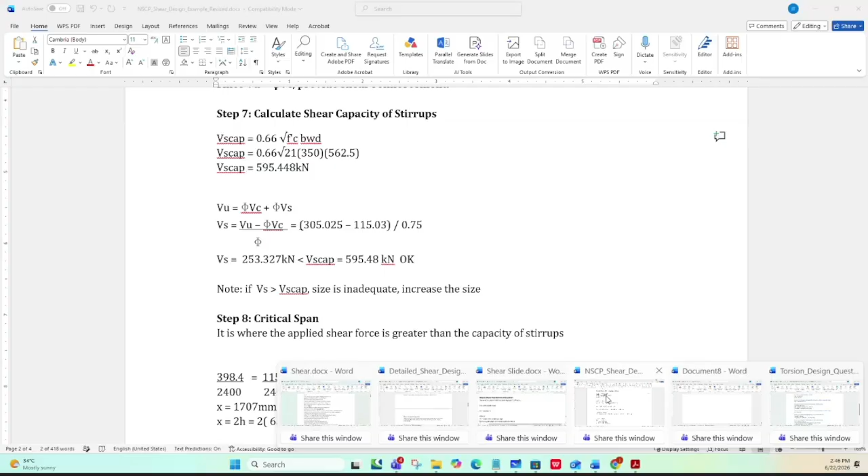Tas yung review, tawag dito, yung pwede kong send, yung send ko na lang kay Mr. Narciso yung mga calculations kasi hindi siya maayos yung dito eh. Yung meron akong sa shear, send ko yung tinatapos ko pa, tong i-add ko lang, nasa document, yan, in document format, i-add ko lang yan. Send ko kay Narciso later yung mga calculations at saka itong mga notes sa RCD. Yan na.